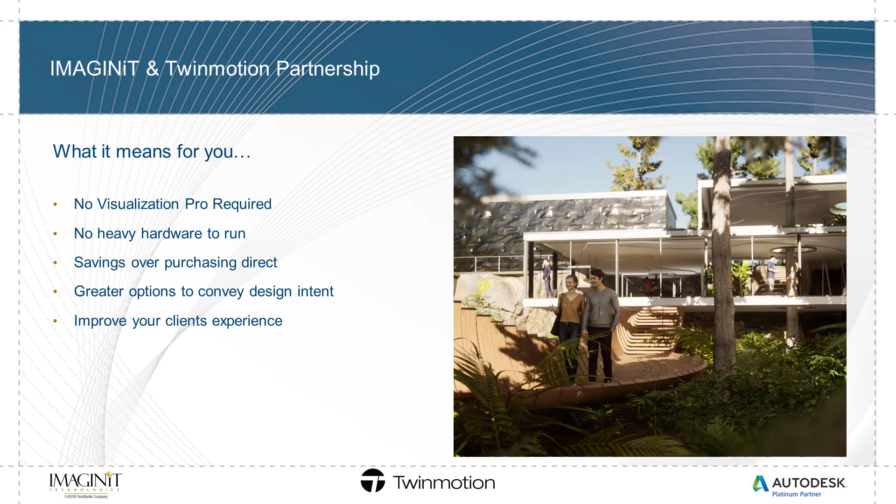Thanks, I appreciate it. I'm thrilled to be here along with Daryl from Epic Games and help kind of kick off our partnership with IMAGINiT.

So with that, let me give you a little bit of background on Epic Games. We were founded almost 30 years ago. We're a global company with 35 offices worldwide at this point, though we're all working from home. A little over 2,100 employees, and most of us, if you not personally, maybe you have a family member, may know Epic Games because we have a very popular game called Fortnite. So a lot of people think of us as the guys who created Fortnite.

And so we operate really in two major divisions. We have a publishing division and a software division. The publishing division creates some pretty cool games, the most popular one these days being Fortnite. The software development division is the guys who actually support game developers other than Epic, and literally thousands of enterprise customers, non-game commercial customers. We think we're unique in the game engine business because being a publisher and also a software licensor not only provides us great revenue opportunities, but also causes us to really be good on the software side because we've got this never-ending iteration cycle to keep our software on the cutting edge, since we're using it for something as massive as Fortnite.

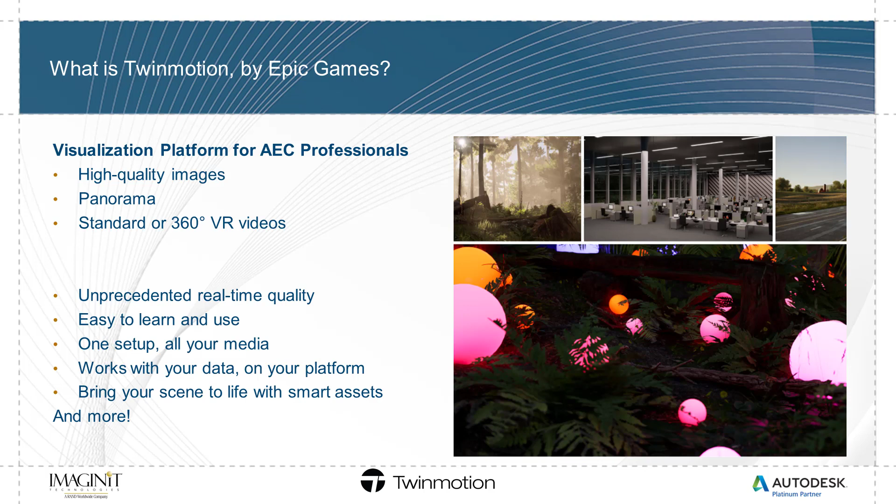Very excited to have Daryl show you the highlights of Twinmotion. And with that, I'll turn it over to Daryl.

Awesome, thank you John for the nice introduction. So I'm going to go ahead and share my screen, and we're going to spend about the next 20 minutes walking you through a presentation that will give you a pretty good overview of what it's like to work through a project inside of Twinmotion.

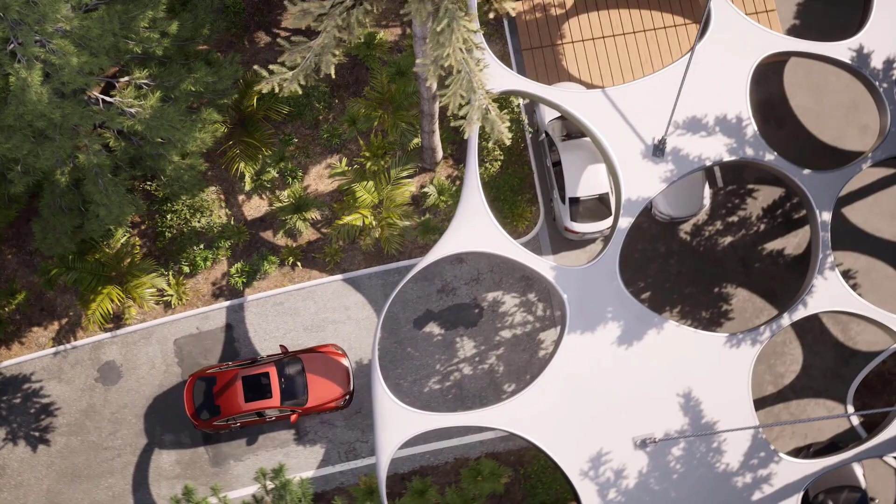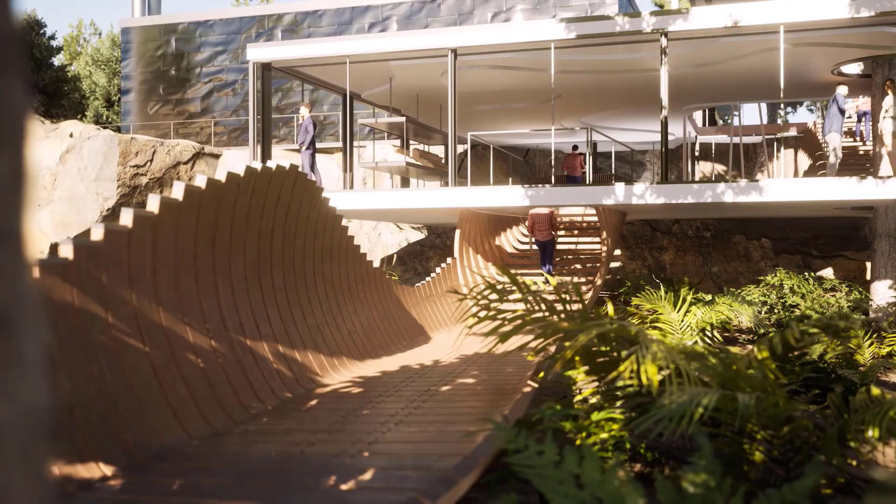And this is the project that we're going to be working with today. This is the finished output of it. You can output several types of media with Twinmotion: stills, videos, as well as Twinmotion Presenter files, which are standalone executables that you can share with your customers or clients, so they will not need to have Twinmotion installed to experience the interactive presentation you author for them. This presentation is based on Revit data.

What we're seeing here is highlighting several of the new features that were inside of Twinmotion 2020.1. We put a lot of work into the visual fidelity.

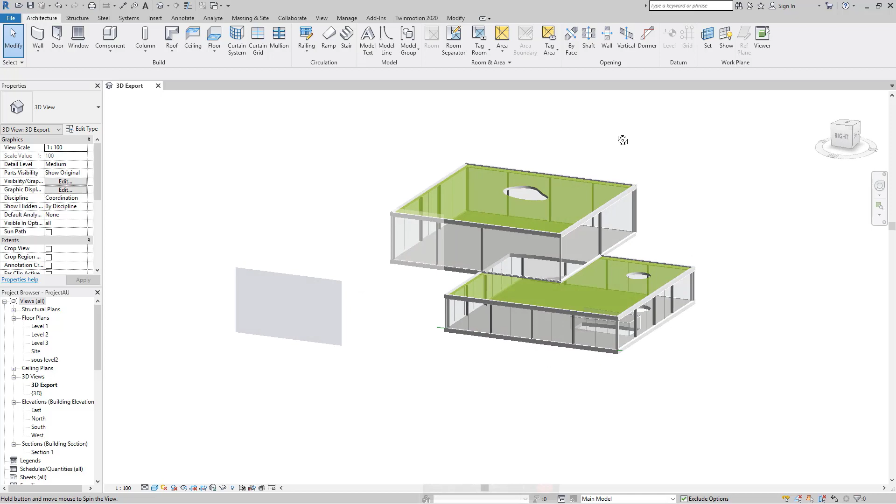So here we are inside of Revit, and this is the main piece of architecture, or one of the main structures that we're going to be working with. And the process of communicating with Twinmotion is very simple. Just click on the export button and you could save a file out, or you can click the See in Twinmotion button, which creates a direct link.

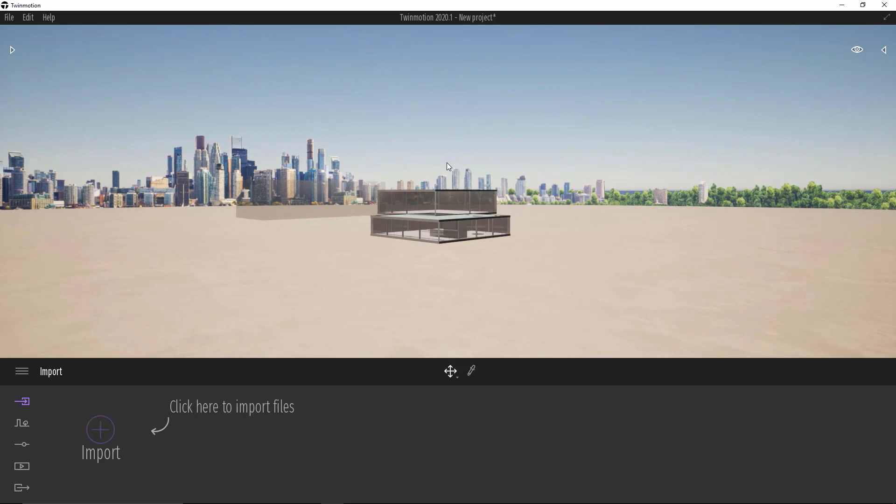So we'll just go ahead and add that into a new project. And here you can see the geometry that's been imported in. Now it automatically assigns materials based on the materials that you had placed in Revit, so it adds on higher fidelity, better quality visuals based on that kind of lookup table.

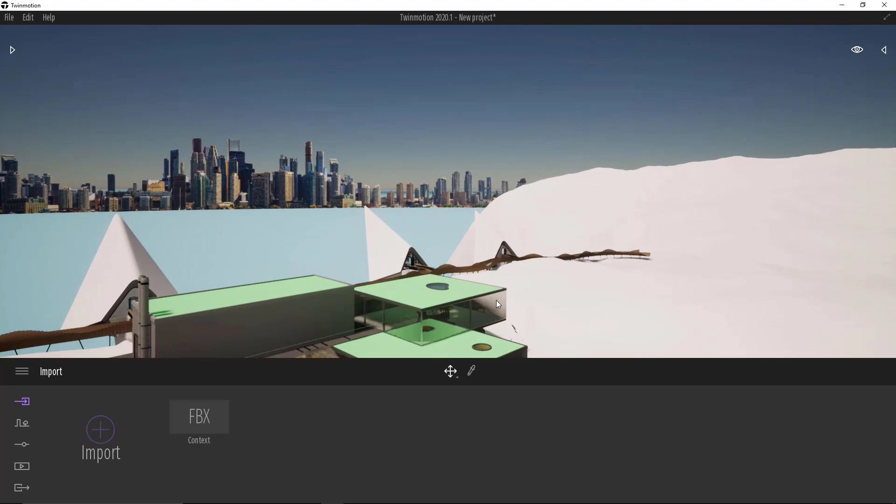So what we're going to do is we're going to import in some more geometry, and we're going to bring in a file from 3ds Max. So we're just bringing in an FBX file to set the context of this a bit more in depth, give it a little bit more geometry.

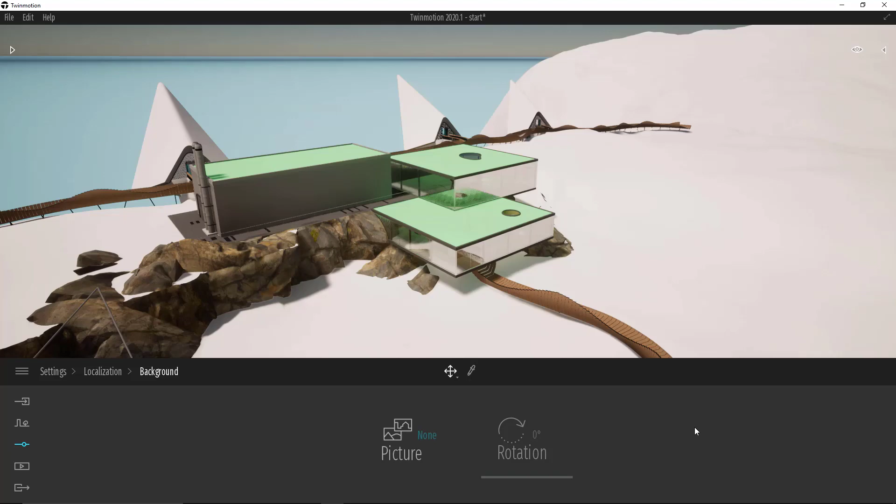So the bottom dock is your main user interface element, and then to the right end of this, you have the ability to adjust your location. And this can be set positionally. You can also set the month and time and day. And what we want to do is we want to get rid of the background and just have the sky system inside of it. So this is a procedurally generated sky that we've now turned on.

Now to the right is another panel, and this allows you to look at the scene graph, so basically the hierarchy of your geometry that's been imported in, as well as some statistics, so your frame rate, how much GPU usage, the polygon count, the amount of memory that you're going to be using inside of the project.

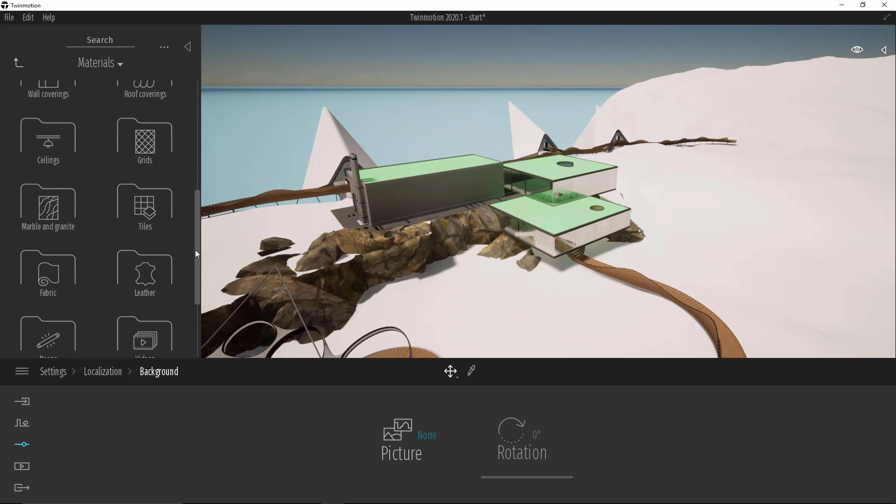To the left is another main user interface element, and this is your library. So this is going to have thousands of materials and objects that you can use to start to populate and dress your scene. So for this example, the first thing we want to do is start to add in some higher fidelity materials.

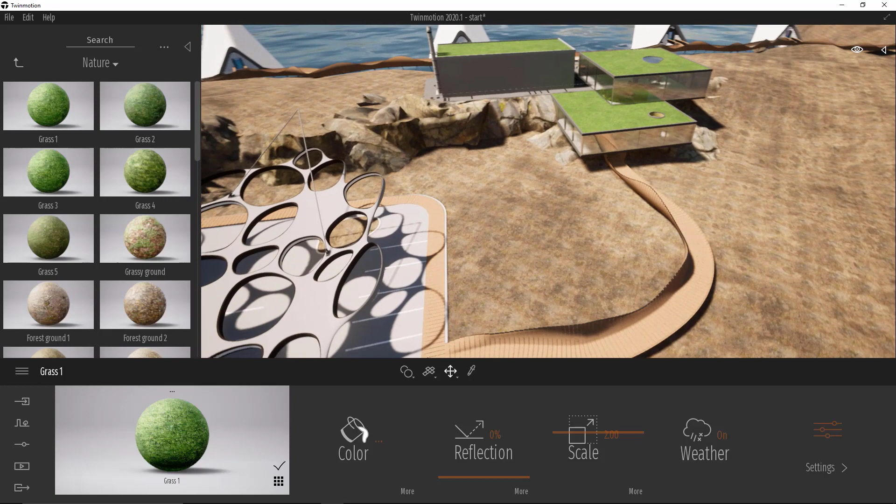So we're just going to drag and drop a water onto the water plane out there. You can see it's got a nice animation on top of it. And then we're going to start to add in some grasses. So there's literally thousands of different materials that you can use. And if you want, you can also add your own texture maps onto these materials.

So we're just going to continue to add a few more materials onto this environment. So we're going to kind of zoom in here and add on some man-made asphalt. Now, any of these materials have a variety of parameters that are exposed in that bottom dock. So in this example, we're just going to scale that down to look a little bit more appropriate.

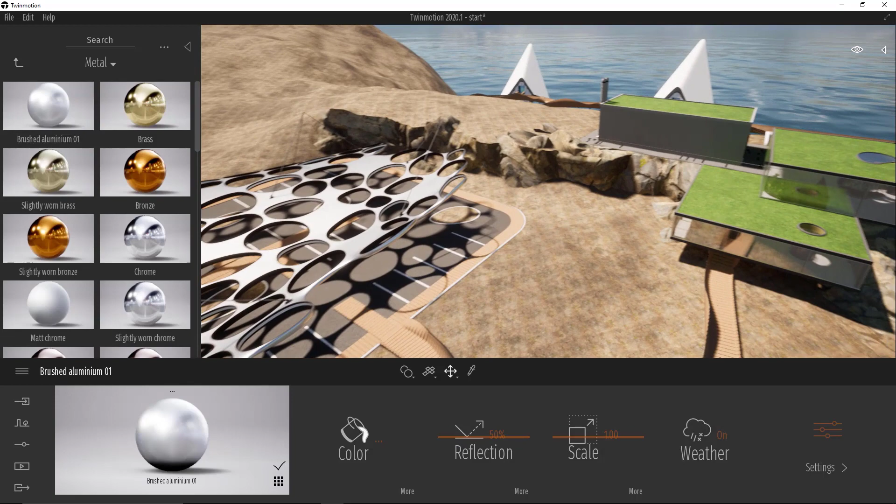And we'll jump back up and grab a few of the metals. So I'm going to just put some aluminum on the roof, and then we'll kind of move over here to these other pieces of geometry and add onto that some titanium scales. So we're just kind of drag this out. It's just a simple process of dragging and dropping to go ahead and make these relationships.

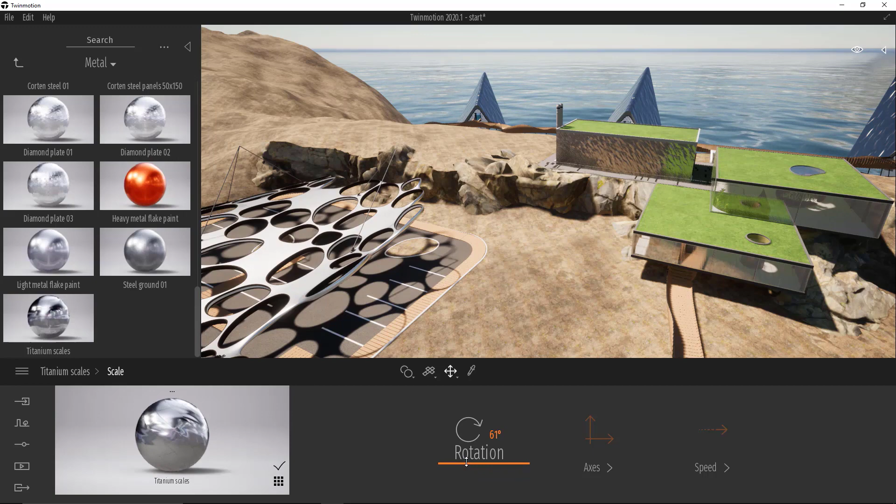Of course, any of the attributes are editable at any given time. So you can see we can adjust the scale. You can also click the More button to get into some more detailed movements. So if you wanted to non-uniformly scale something or rotate it, you have those options. At any time, if you want, you can use numerical inputs.

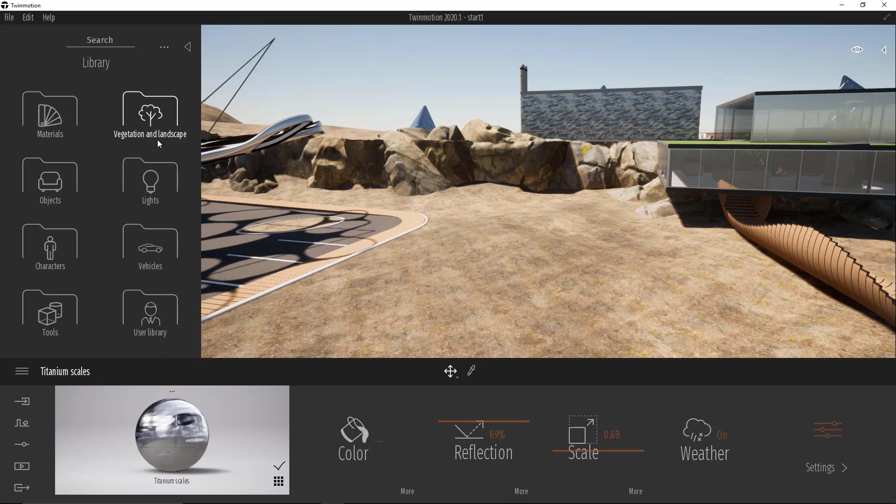So now that we've got some materials assigned and it's starting to look a little bit better, let's go ahead and start talking about vegetation. Vegetation's been an area of focus for 2020. We've put a lot of work into creating really beautiful trees and landscape vegetation.

So there's a variety of different objects that we can drag and drop out. And again, it's a simple process of just literally dragging and dropping. So we'll put a pine tree inside of here. And one thing that's really nice about these, as I zoom in on them, you'll notice that they have a little bit of animation on them.

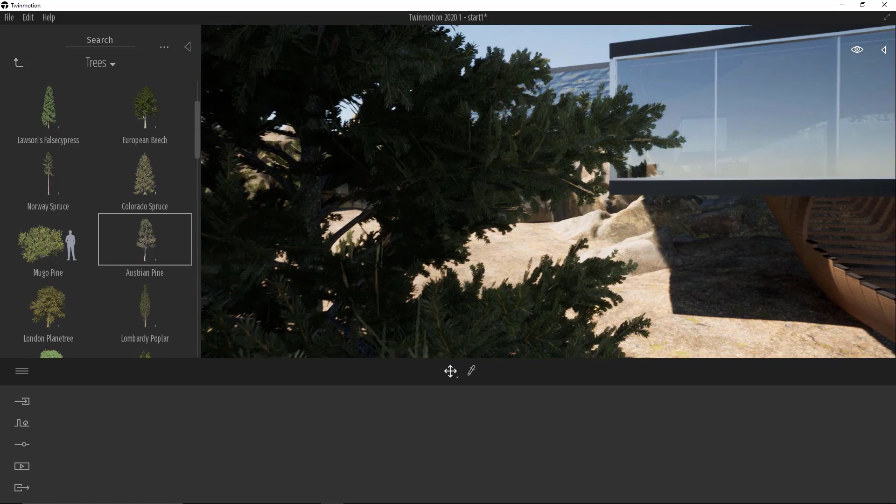The wind kind of moves them around, and they also have the ability to interact with the sky system in a very nice, realistic manner. So you get that nice kind of backlighting or subsurface scattering kind of penetrating through the needles of that pine tree. Now, another thing that's interesting about the vegetation is we have the ability to adjust the trees based on the life of them.

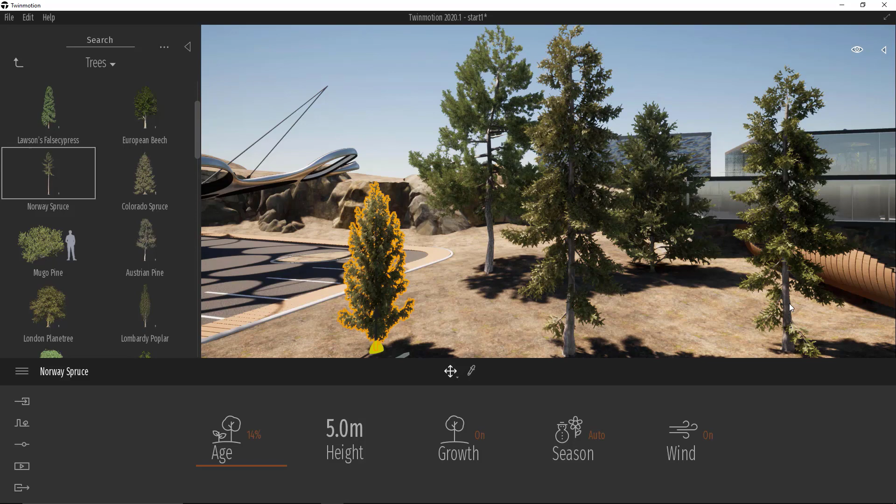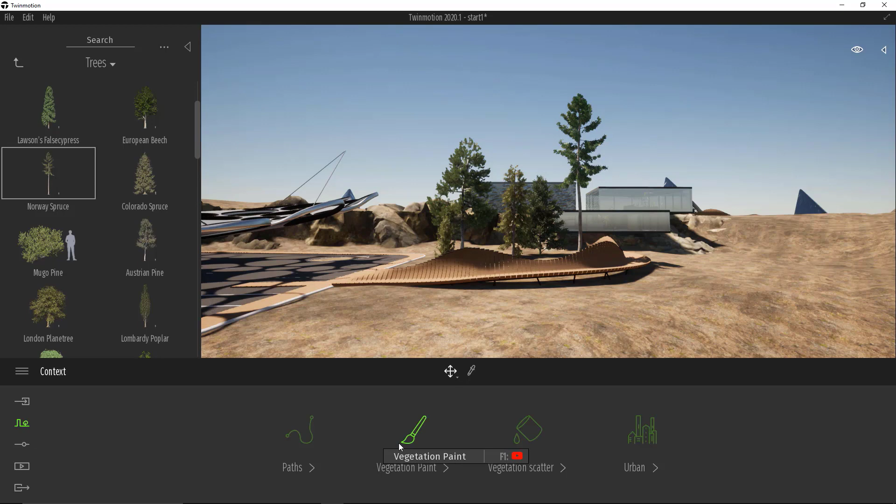So I'm going to drop down 3 different trees here, and each time I drop it down, they're slightly different in size. As I scale this down, you can see the young tree's branches grow in a different way than the medium tree in the middle, or the adult tree on the right-hand side. Every tree in here has this growth mechanism built into it, which is really pretty awesome. It's not just changing the size or scale, it's actually changing the way the branches grow based on the age of the tree.

So there's a couple different ways of adding trees. Obviously, dragging and dropping is one way. Another way of adding trees into your scene is to use a paintbrush workflow. So here I've gone ahead and added in just a simple spruce tree.

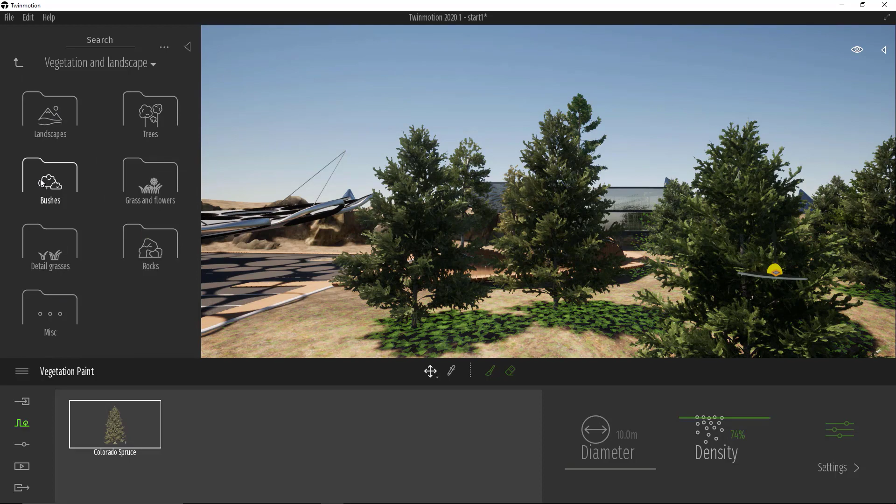As I start to paint this tree around, you can see that I'm getting a visual representation of the areas that I've painted on. That's the pulsating color that we're seeing. I can always go back and adjust the density, so it's a very non-destructive workflow. If I want to, in that same painted area, I can start to add in more trees.

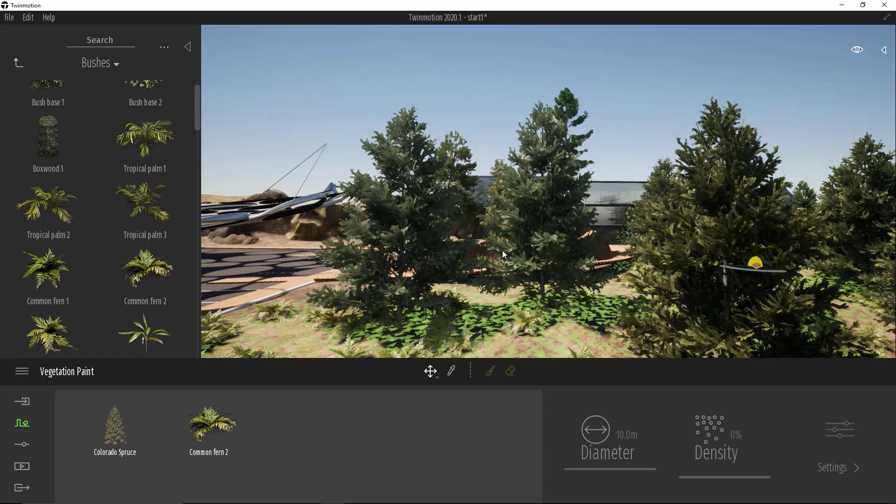So we'll just add in this fern. The fern is actually interesting because this is derived using Quixel-based assets. Quixel is another company that Epic has purchased, and it allows you to create these very high fidelity images. You can see it works in a layering metaphor here. As I start to play with these densities, I can really fine tune and dial this in to look exactly the way I want, which is pretty awesome.

So a third way of adding vegetation is to use the scatter tool. Scatter is going to allow me to basically use a paint bucket tool to flood fill large areas of terrain. So we'll just grab the spruce, I'll grab my little paint bucket, and I'll just start clicking on this. Every time I click, it's going to go through and add in more and more trees.

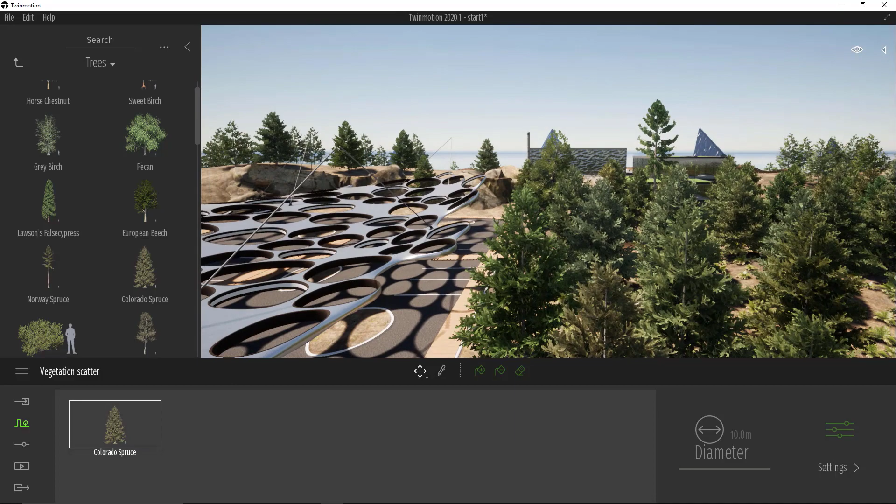You can see as I move around here and rotate around the environment, that we've added trees across the whole environment. This is one of the things that Twinmotion does an amazing job of, dealing with massive amounts of data very, very quickly, while still maintaining that super fast frame rate.

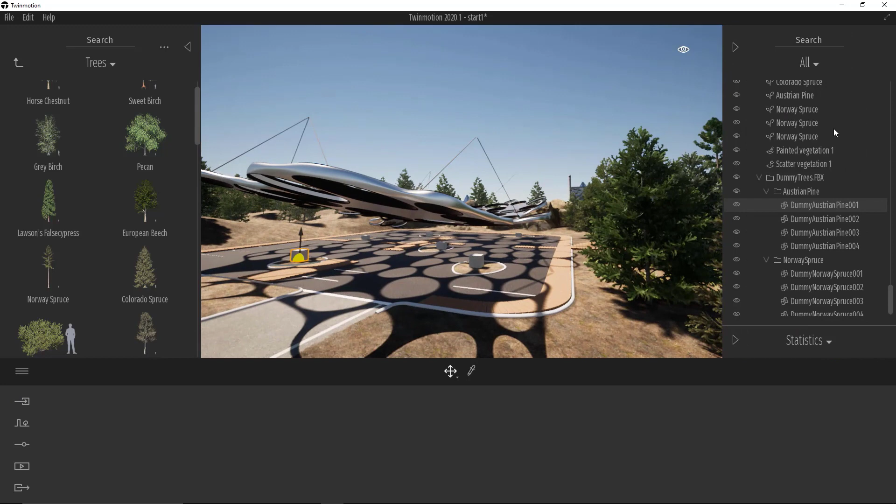So another way of bringing trees in or working with trees is to do a search and replace. I'm bringing in a dummy file, just an FBX file that's going to have some place locators for me. What we want to do is replace all of these cubes with a certain species of tree. All I have to do is highlight the cubes, jump over into my library.

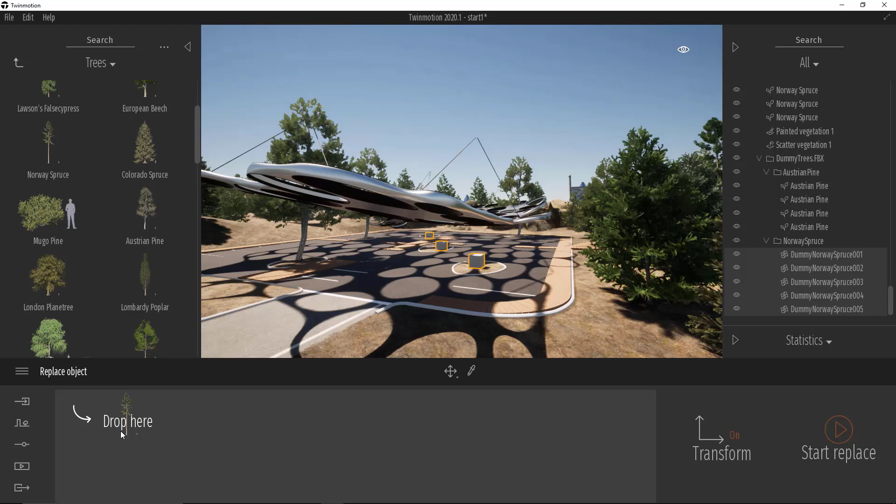Then drag down into that lower dock the tree that I want to replace, and just click the start replace, and it'll go through and update those trees or replace those cubes with updated versions of those trees. We'll do the same thing for the spruce trees, again dropping it into the dock and clicking the start button. And of course, at any time, I can go back and give them a little bit more size if they weren't exactly the scale that I wanted.

So that's basically the workflow for working with vegetation inside of Twinmotion 2020.

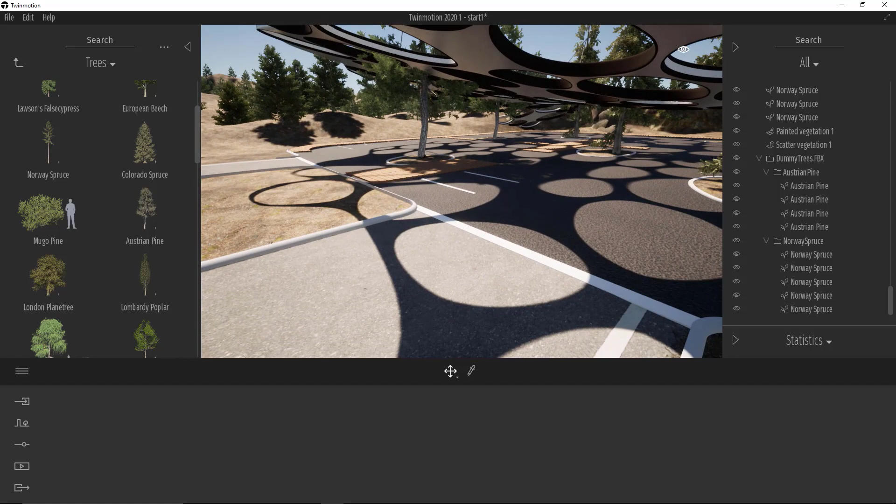So the next thing that we want to do is talk about this parking lot and how we can start to populate this with some vehicles. We're going to do a similar workflow to what we just did before. First, I'm going to make this a little bit darker, it's a little light, that road there. So I'll just grab that material and drop down the intensity, and that scale looks a little off too, so let's just clean that up a bit.

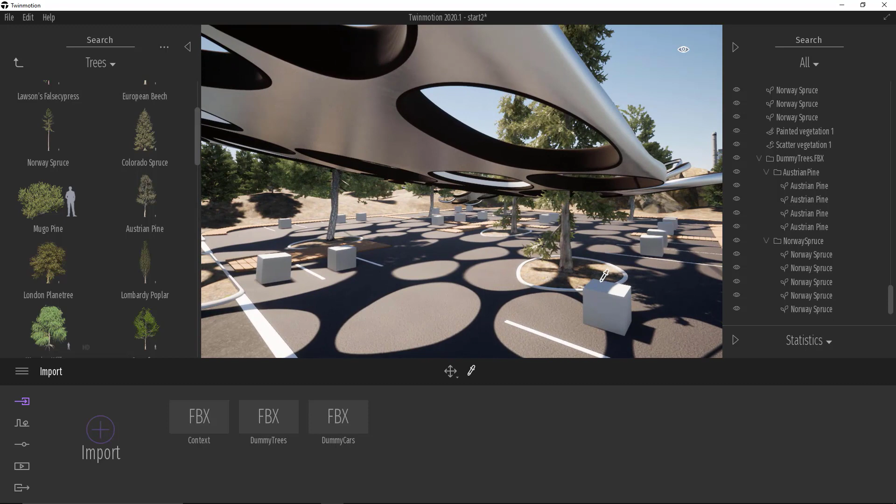All right, so with that done, the next thing we want to do is import in another set of helpers to let us place a car. In this example, I'm going to have it maintain the hierarchy, so by saying keep hierarchy, it's going to give me an individual transform for each node. This is important because it's going to allow us to put unique cars onto each one of those cubes.

Similar to what we did with the tree, we're going to highlight them in the scene window on the right-hand side, go back and click replace. When we do that, we can jump back up into the library, go into the vehicle section, and we'll just drag in here several different cars. In this example, we'll grab a couple of cars, an SUV, and maybe a wagon.

And now when I hit start replace, it will randomly place all of those cars. And of course, at any time, if you don't like the color of a given vehicle, you can go back and modify that or change it. So you have lots of creative flexibility throughout the process as you're working inside of Twinmotion.

So the next thing we want to do is we want to have cars driving down the road. This is easily done by just creating a vehicle path. This allows me to grab a pen tool and simply start dropping down spline points, making a Bezier curve of where I want these vehicles to travel. I'll click a few more points, and with that done, we'll hit the return key. As soon as I do that, we have animated vehicles in our Twinmotion file. It's that easy, very, very fast.

And like the trees, we always have the ability to go back and dial in the density or adjust a variety of parameters. Another thing we can do is go back and adjust the overall position points of that spline. So I'm just going to push the road over a little bit to the right there, and as soon as I let go, you can see that it updates and takes those changes into effect. So now we've got this looking pretty sweet, with some cars coming into the parking lot, and you get a good sense of how fast and easy it is for me to do this type of work.

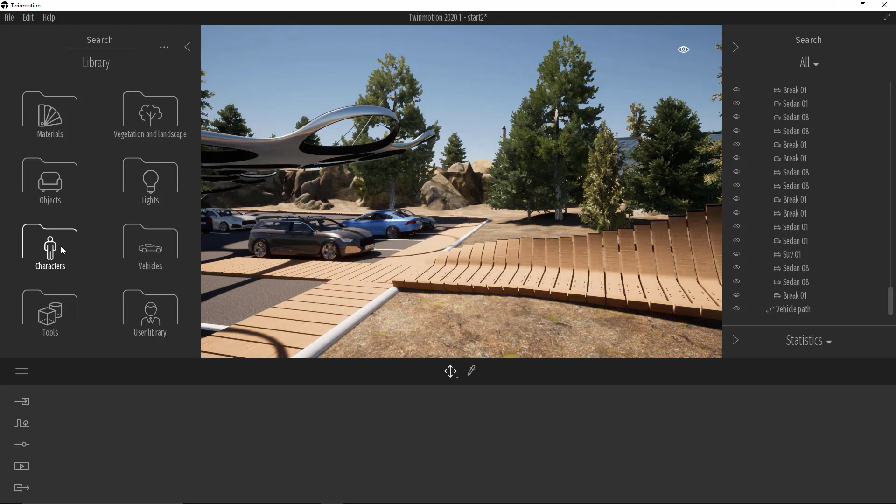So the next thing that we want to do is let's add some people into the environment. We'll go back into the library, into the characters section, and I'm going to just grab a few groups of people and simply position them.

The people are high quality, they're animated, as you can see. We have static people as well as cutouts if you want to use a variety of different looks for your visualization. At any time you can go in here and make modifications. So if you don't like the animation they're doing, you can change them around. There's some that are kind of ridiculous, like dancing, but you never know, you might need that. Let's go back to idle. And if you don't like the colors, you can always go and select any of these unique people and change the presets. So lots of flexibility, lots of creative freedom built into all the different smart assets inside of Twinmotion.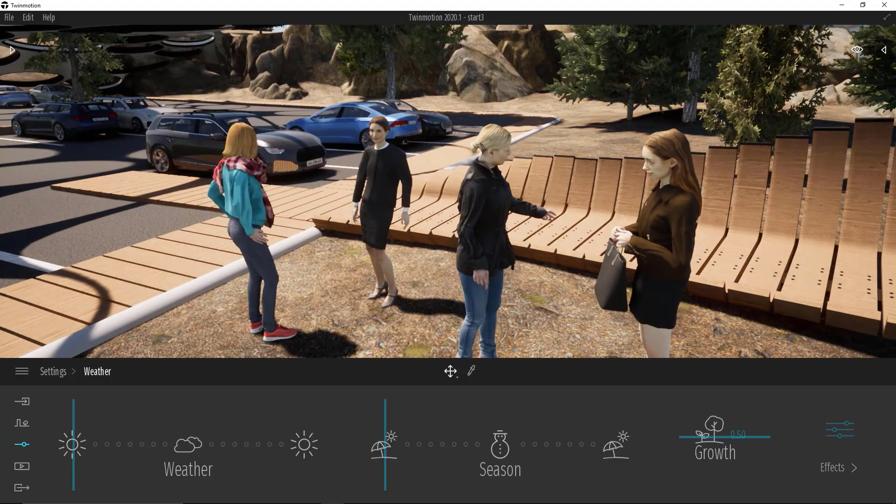That's pretty fun. All right, so the next thing that we want to look at, let's just clear up our UI a bit, is the weather system.

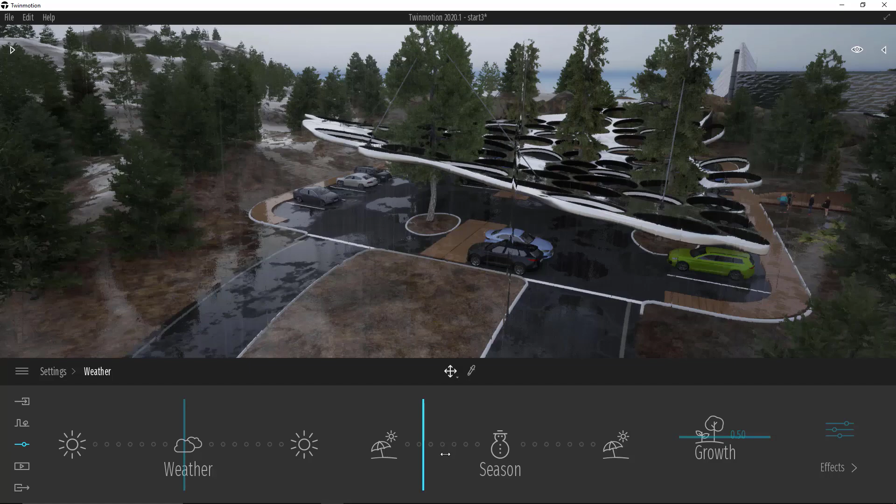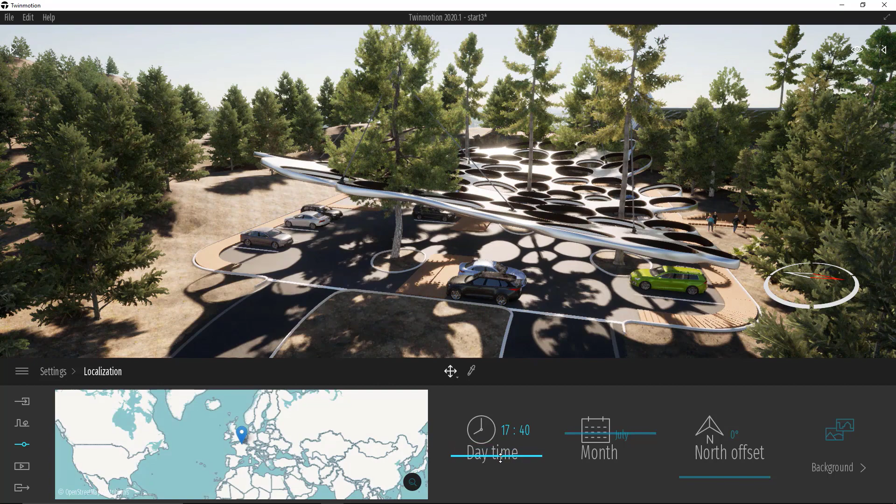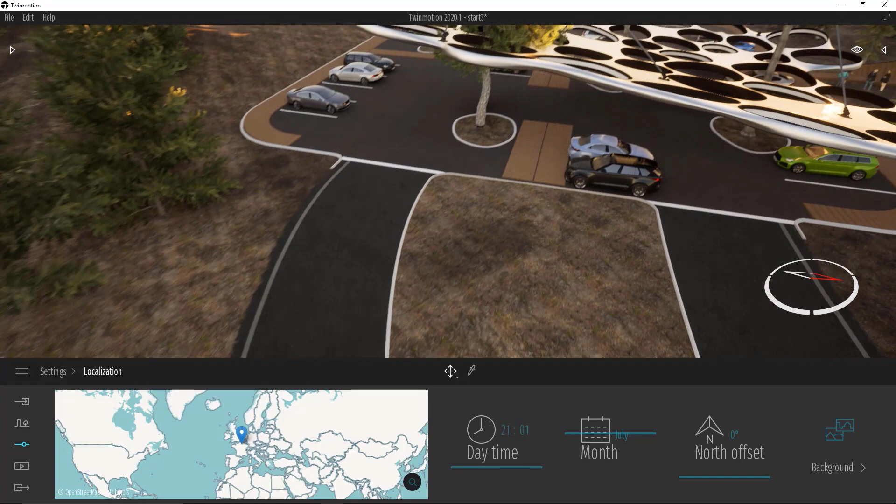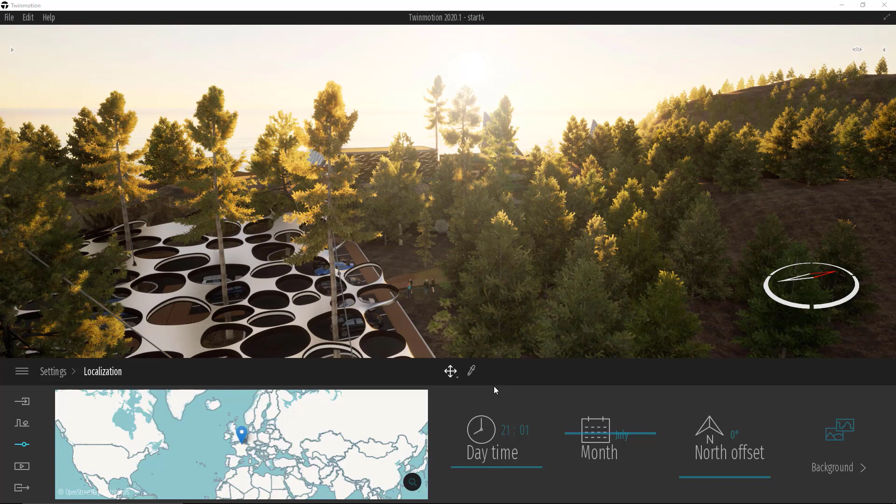All right, so with that done, the next thing we want to do is go back into our dock and jump into the localization section. At any time you can adjust the time of day. It's all procedurally driven from that sky system, so we can get this nice golden hour look. You get this really nice lens flare and bloom effects happening, all interacting with the other materials in the scene, and it will accurately represent the sun based on the date, location, and time. So all the things you need to do sun studies are built in.

Another thing that's kind of beautiful and newly added is the smog. As we start to enter in some atmospheric or smog effects, you can see it got a lot warmer, but we're also going to get these really nice streaky God rays coming through those trees as we move through here. You get a sense of how that bloom burns around the trees, all that backlighting scattering effect as the sun's penetrating through that vegetation gives you this very highly realistic looking environment.

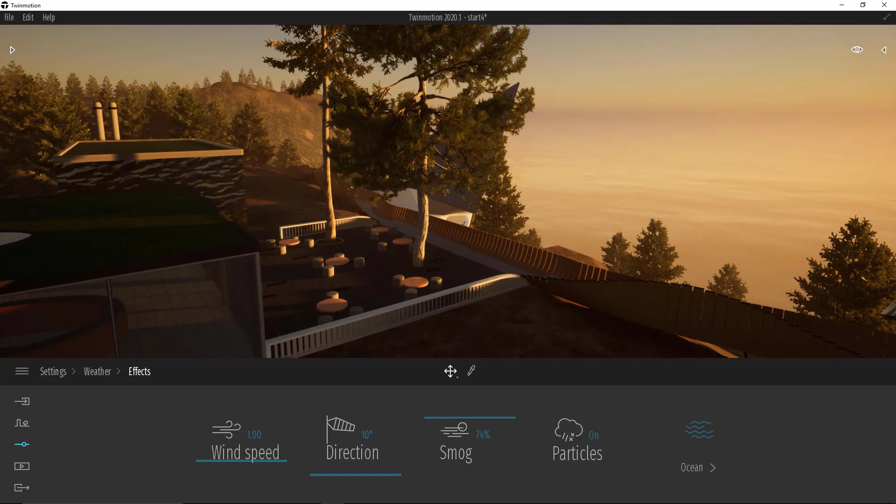We're going to fly over toward where that Revit model is that we imported in, and start to talk about a few more advanced things you can do with the look of your scene. Let's go ahead and drop the smog down, get the sun a little bit higher in the sky, and get some shadows coming across here.

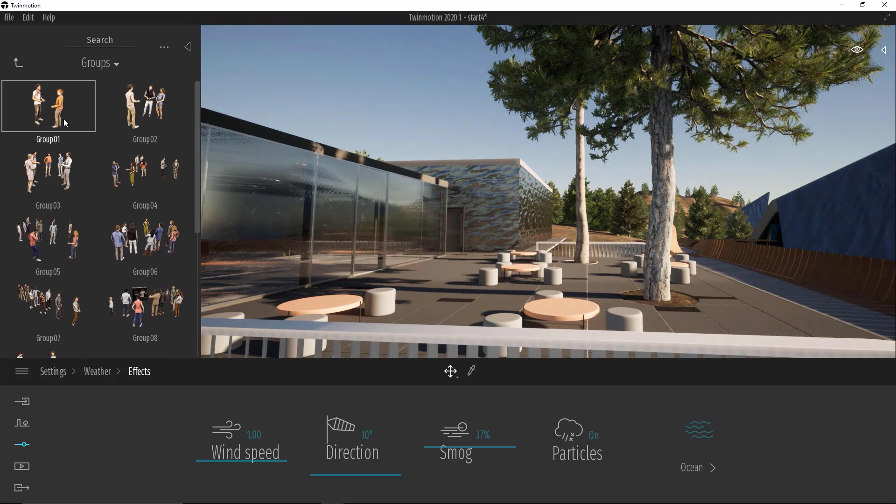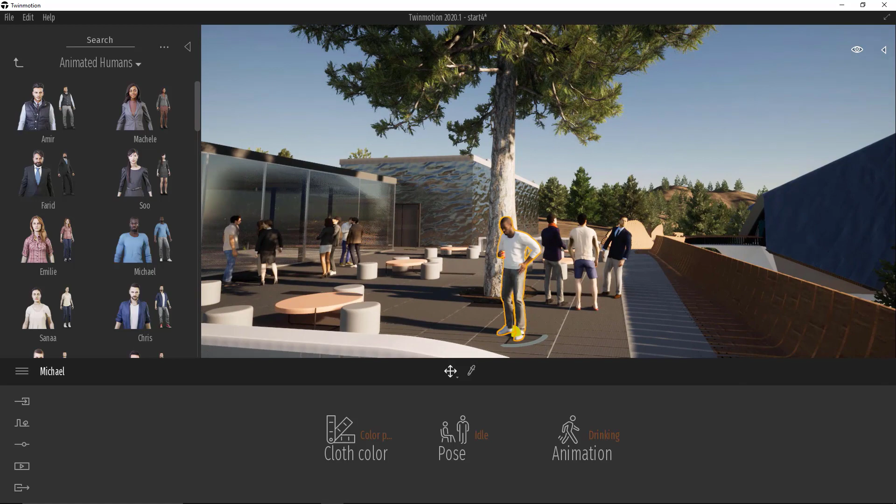We're going to add in a few more people into our scene. We'll go back into the library and grab a couple groups of people over in this area. I'm going to jump up really quickly to the single humans section and grab an animated character. We'll grab this guy, Michael, position him and rotate him around. He's going to be our hero character that we'll be focusing in on.

So we'll change his animation to something a little different, switch his shirt to a different color, and we're going to frame in on him.

The next thing we want to look at is the main dock here, the camera. We have a variety of different camera settings we can use. I'm going to add a little vignetting to darken the edges, and adjust the field of view, getting it down to something in the 50s to give it a bit more depth of field when we turn that on. By getting that camera lens field of view down a bit lower, once we enable depth of field, which is very high fidelity here...

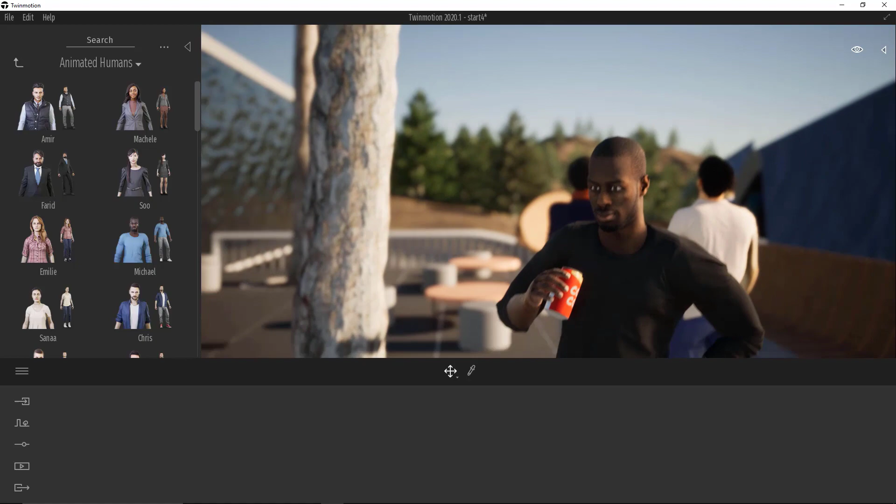We can jump into the more section and just click on the focus point. Now as I move my camera around, we're auto-focusing basically on this character's head. All this stuff works together, which is what makes working in Twinmotion so fun, the ability to get this extremely highly realistic look very, very quickly.

Let's turn that depth of field off and jump back into the library. We're going to go down into the tools section and look at notes. Notes were newly added, so I'm going to drop a note on here just saying, I think these doors should be open. Let me spell this correctly—let's go back and redo that ever so quickly.

The thing that's kind of cool about the notes is that they can actually go back into Revit. You can export this out as a BCF file. So here we are inside of Revit, and what I want to do is just change the property of that door from being closed to being open. Because we did this with a direct link, all I have to do is sync in Twinmotion, and you can see just like that, we've synchronized those changes, but we've kept all the work we've done inside of Twinmotion, which is super, super powerful.

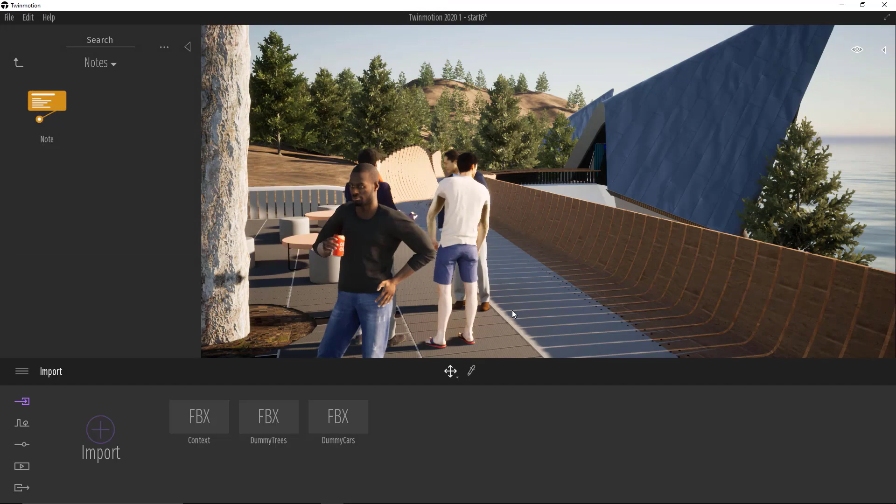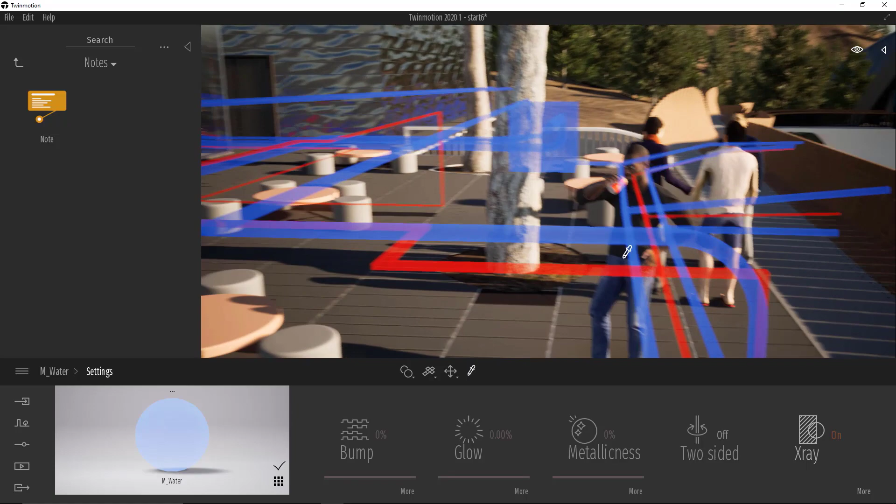So we're going to go ahead and import in another FBX file, some mechanical information. If we drop down here below the ground, you can see we've got some representations of electrical or mechanical information, maybe some piping or electrical stuff. What I'm doing is going through and turning on X-ray, so by enabling X-ray on the MEP, it will allow it to be visible through the ground.

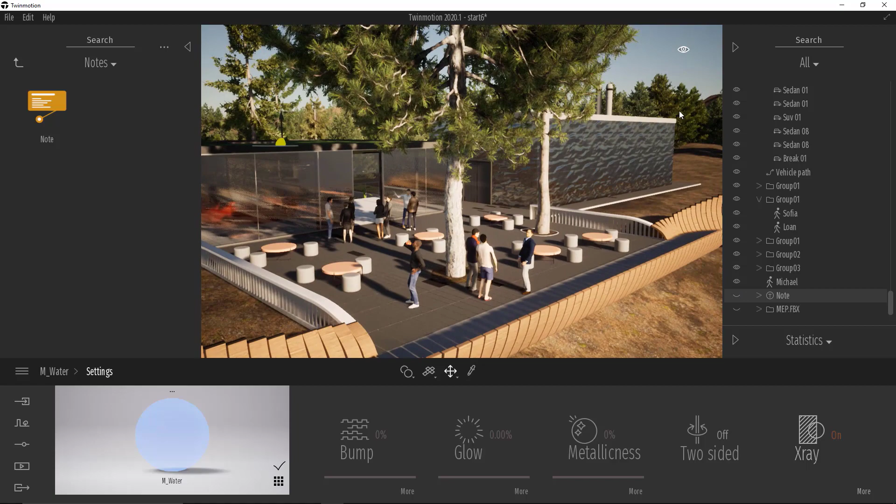As we come over here, you get a really good sense of what's happening with the site and all the mechanicals based on what you can do with the X-ray, being able to see through it, which is pretty good. Now at any given time, you can go back into your scene graph, and there you can disable the visibility of any object—so we can turn the MEP off or the notes off if you want to.

The next thing we want to look at is a slightly more completed version of this—this is the end result file. At any given time, if you go up to the eyeball and click on it, you can always visualize it in VR, and you can also adjust the time of day.

Pretty straightforward stuff there. Now on the dock, I've jumped into the media section, so we can have images, videos, or presenter files. Let's jump into images and talk about the creation of those really quickly. I've already got a few of them set up here, and if you click on them, they basically take you to snapshots of the scene.

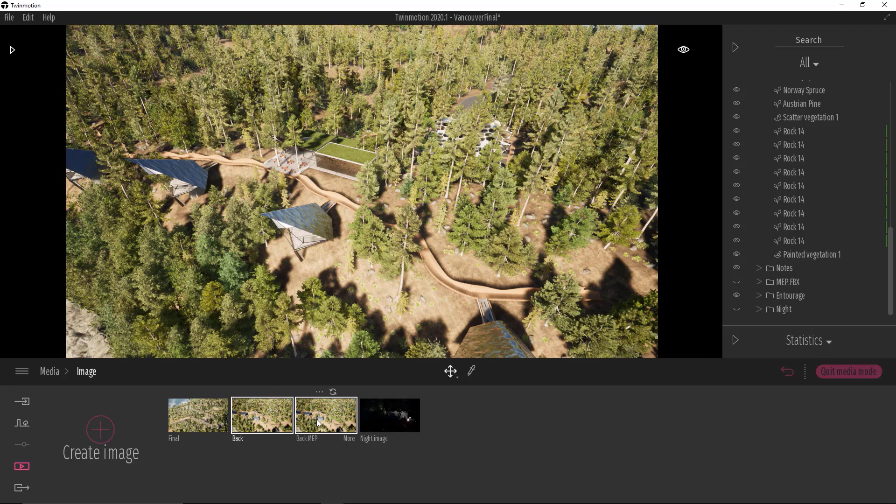You've recorded a state of that scene. The difference between the back and the MEP is literally just the display of the visibility of it. Everything is recorded in that state or snapshot of that image.

Now the night image is really interesting. As the sun drops down, the lights basically turn on, which is pretty awesome. What we're looking at is the contribution of the lighting.

We're pulling the exposure up here, doing something pretty sophisticated and very new in both Unreal and Twinmotion, which is screen-based GI. You can see that little bit of spill that incandescent object introduces as I toggle it on and off, as well as the more realistic shading happening on that walkway based on that screen space GI.

Really pretty awesome. Making a new image is a simple process. We'll start with the back image. I'll just fly in here and frame up the people on the deck, and all I have to do is click the create image button to record that new pose. I can easily jump back and forth from back to the new image we made.

The final thing we want to do is generate a video. Let's jump back into our media and into video. I've already got some videos in here, but we're not going to be using those, so I'm going to create a new video.

This is basically similar to making images. It's going to record snapshots or key poses that you set. We've got our first pose that we created when we made the video. I'll fly in here and frame up on these cars as they drive down the road, and once I get to a place I like, I just click the plus button and I've made a keyframe. So now we have a 10-second animation in between those two keyframes, which is pretty awesome.

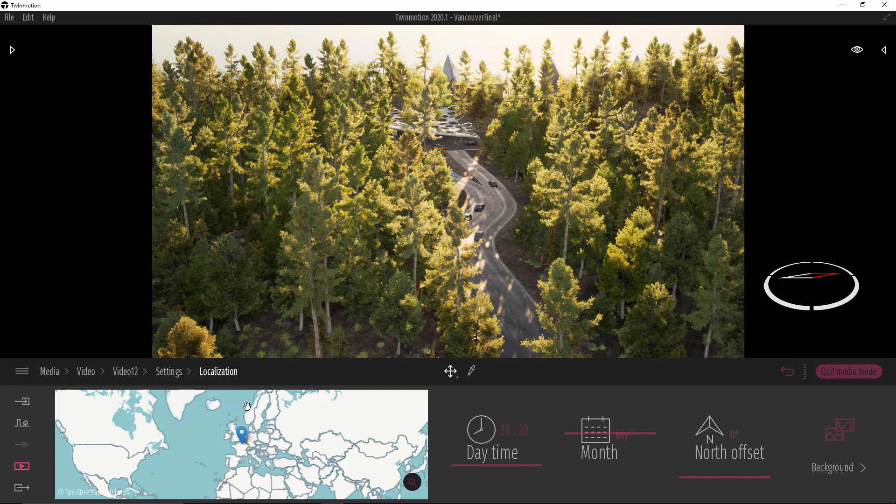You can always click the more button and start to modify things like the time of day, so I can make it go into the night or the morning. We'll actually go the other way and pull this back down, and get a low sun with that little golden light coming through. The spec coming off the highway looks really nice.

If we jump back to the video and scrub through it again, you can see that not only do we have the animated camera, but we're now doing a simulated time lapse of the sun wiping across that. Now if I want to make a change to a position, all I have to do is move the camera to a new position and click the refresh button to recapture that. So you can see how easy it is to modify and make iterations of that.

The final thing we want to talk about is the presenter mode. I'm going to create a new presenter, which allows me to take any images or videos I've made and author them into a sequence. Think of this as PowerPoint on steroids.

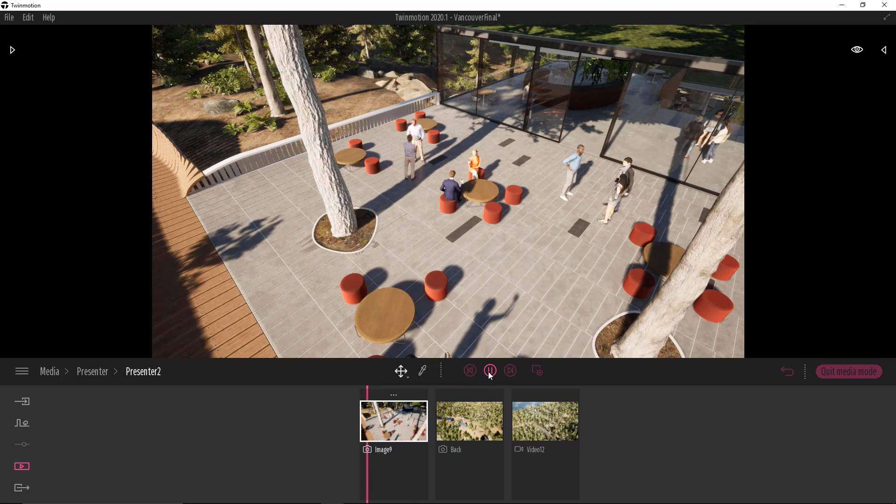I'm just going to drag and drop all the different images I've made, and set them up in the order I want to present to my client or user. The presenter is going to be a standalone executable. So what we have now is basically 2 stills and a video. If I hit play, this is what I could package up and mail off to a client—they wouldn't need Twinmotion installed to experience this.

The thing that's great about this is it's not just a video. If we send someone a presenter file, it's going to be interactive. They can go in there and move their camera around or interact with this, and they're always going to be one click away from VR also when they're in presenter.

So that's basically Twinmotion in 20 minutes. Yeah, I think we're going to do some Q&A now.